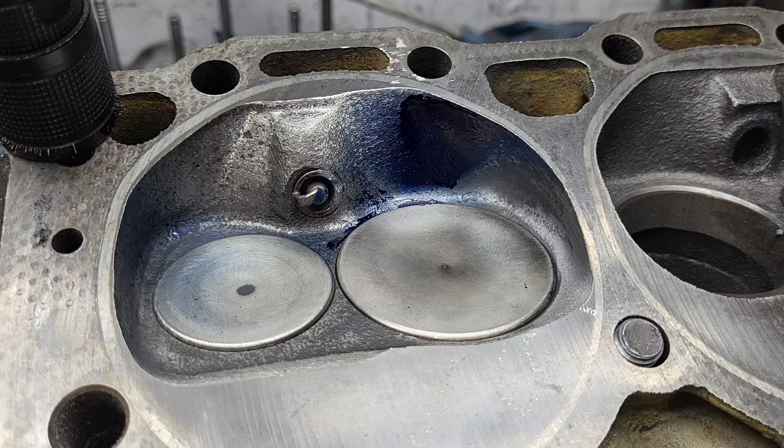Okay, guys, back on the throttle body Mission Impossible. The only thing that I changed at all on this was I took this corner out. You can see the difference between this corner and this corner. They're really blocking this off quite a bit, even with a 194, right? Now, you got to remember, I had that plunge cut out for the 2055, but it was still really close.

So this frees up some area right here, which, in my opinion, should speed up the short side because it's going to be able to get air out easier this way, which will also counteract our swirl a little bit. Now, will that be productive? We'll find out. As far as our liquid on our chamber, really doesn't look much different than the last time we looked at it. It looks damn good.

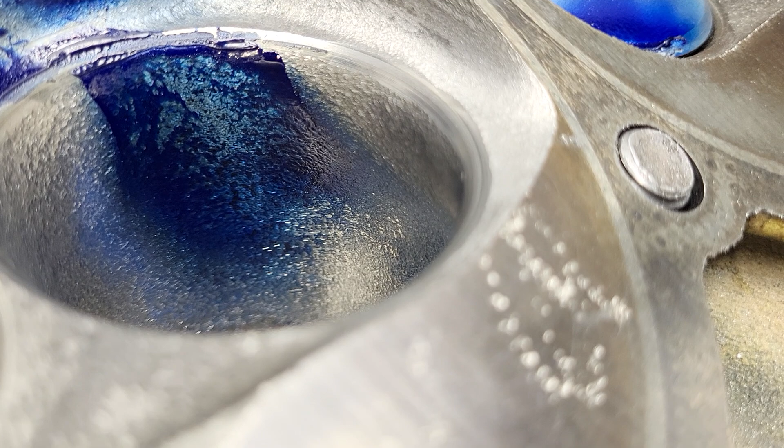Let's take a look at our bore. Okay, our bore looks pretty good as far as I'm concerned. No big changes. All right, that does look a little bit different. I think it's a little straighter and a little narrower, but on the divided wall side, that looks like it's moved over quite a bit. I don't remember this having this angle right here on the last flow. Now, that may have something to do with more air coming out this way, right? Interesting to think about.

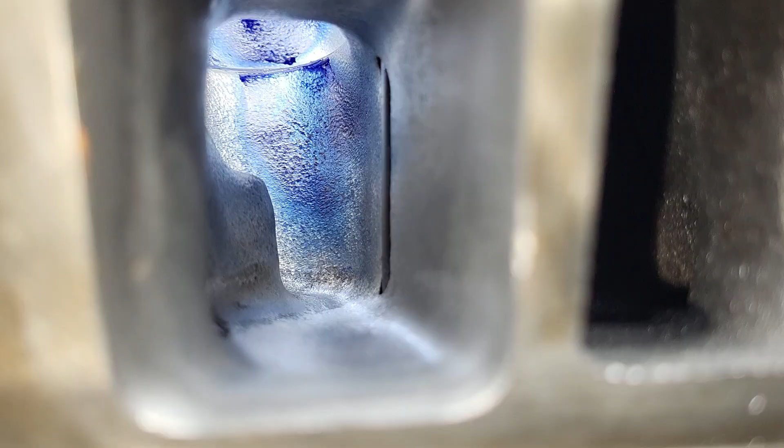Okay, take a look at our valve. It's definitely lighter on this side. It's more concentrated on that one side there. Okay, it definitely looks narrower in the center of that bore than it was to me. We'll have to find out, according to the flows and the swirls, whether it's worth notching that chamber out or not. Remember, you lose a little compression that way. I mean, if you gain flow, does it really lose compression? I always thought about that. It would have to gain a decent amount of flow in order for it to be worth it, I think, at this point.

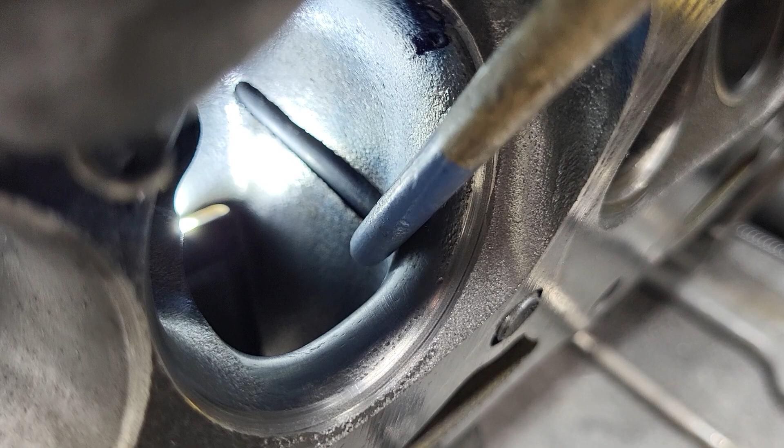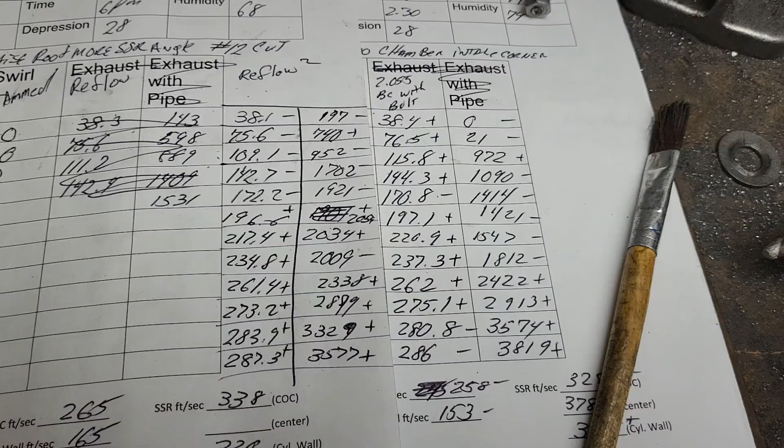Okay, trying to see what we can see there. Let me see if I can one-hand this for you guys. Since this has been freed up, we're able to get more across this side. So this side should have sped up in airflow speed. Okay, the rest of that short side and everything is exactly the way we saw it last time. Okay, I goofed up. I actually did the first flow without the damn bolt in there. So we're not going to count that one. This one, I put the bolt in because that's how the 12th cut was done.

So how did we do? We got plus, plus, plus, small pluses, but still pluses, minus, plus, plus, plus, but it didn't quite top out as good. So if we're running at 600, we got a little bit of a gain at each point, a little loss, a little gain. This is actually a decent sized gain right here. Right, 109 to 115.8. That's a good jump.

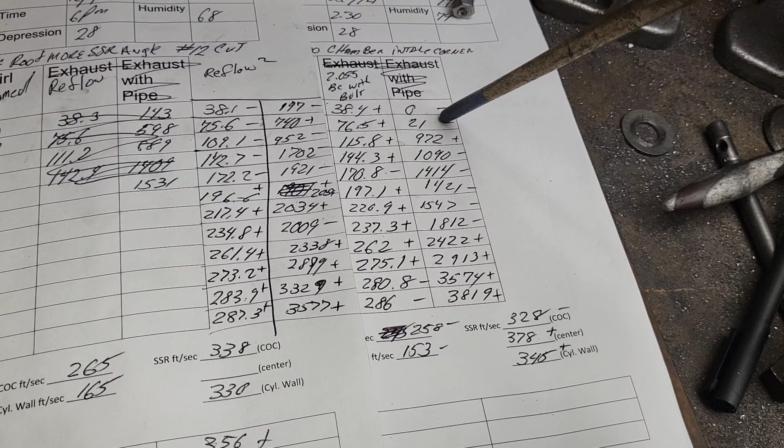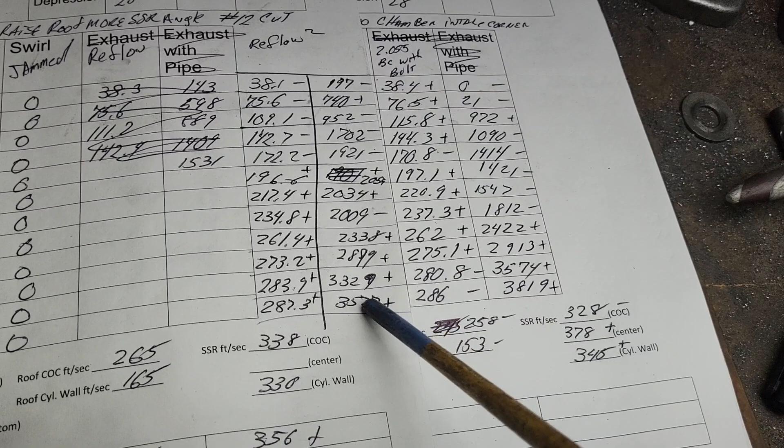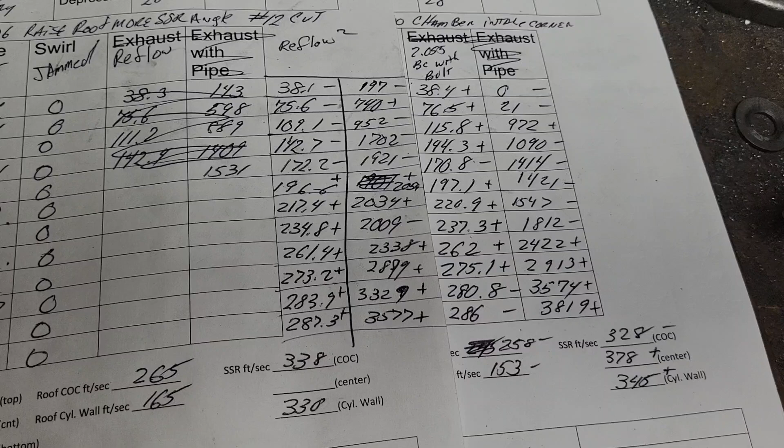Now let's take a look at what happened to our swirl. Notice we said it should knock the swirl down. Well, it did. It was actually 0 at the start, which I was amazed to see. And then it progresses nicely, and then it kind of gets overly fast at the very end. It's actually still a little bit faster than I'd like at 600 lift. But this is a better curve than this curve. So, considering how many pluses we have, and the swirl, I'm kind of leaning towards it, even though I didn't like the Dicam quite as well. And when we go through the airspeeds, I think I might be able to explain that.

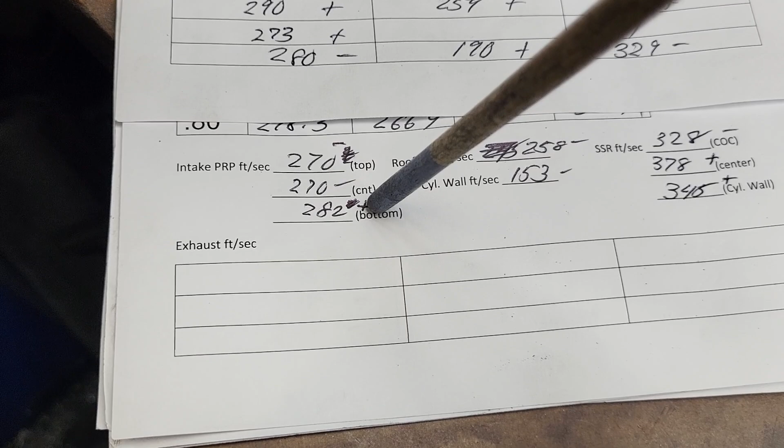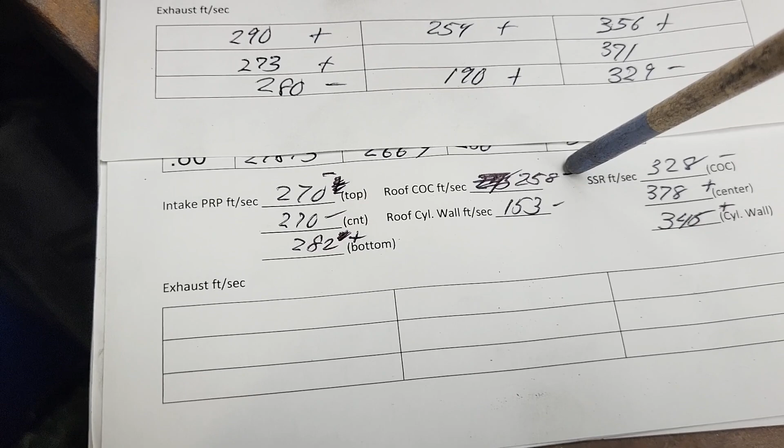Okay, these are our 12th cut airspeeds. These are our 13th cut airspeeds. So these actually went down a touch. This went up a touch. All measured at 600 lift. Not really sure. I was having a bit of an issue with the clay. The clay was starting to give me a hard time, so the clay may not have been exactly the way it was last time. As far as your roof, there's a mistake there. Let's fix that. Okay. Our roof got faster on the center of the cylinder, but it got slower on the cylinder wall side. Let's see what happened on the short side.

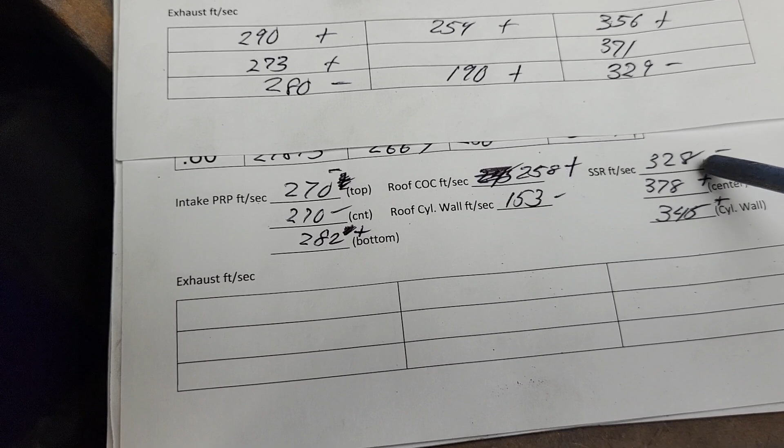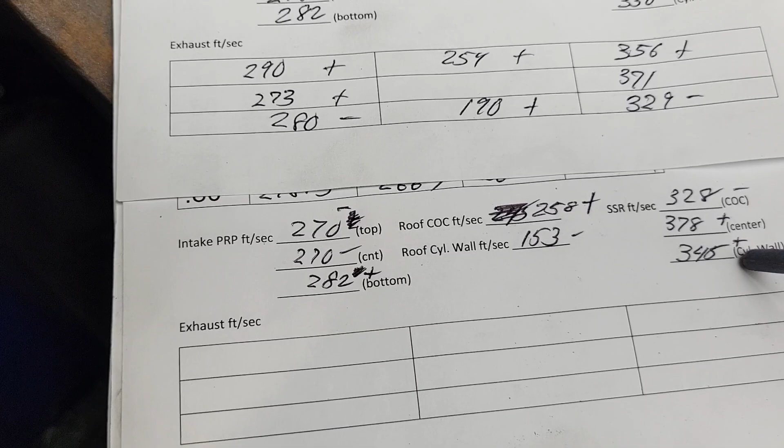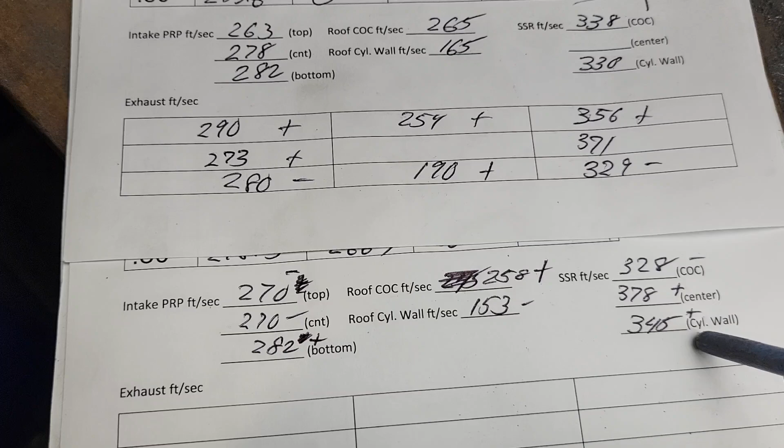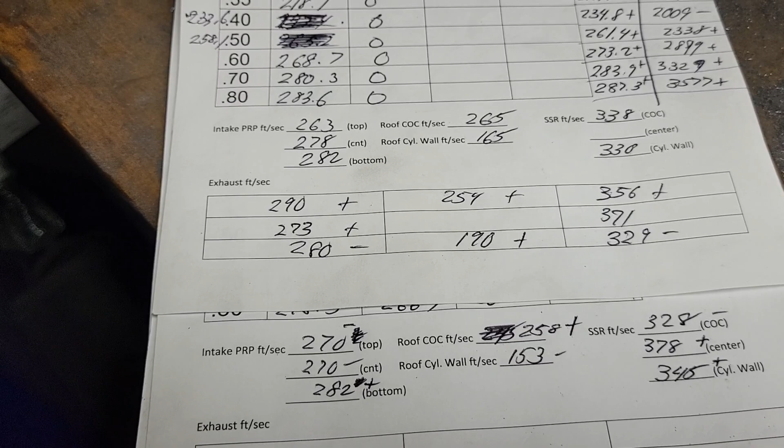Okay. Center of the cylinder, we lost quite a bit of speed, 338 to 328. The center stayed relatively the same, just went up a touch. Look at how much higher it went on the cylinder wall side. Because it's able to get the air out easier, that really cranked up the airspeed right there. There is probably something to be gained doing something with that corner. I'm going to have to think about exactly what I need to do with it. I don't know. Give me your input on where we should go from here. In reality, it's like the man said, stick a fork in it. It's pretty good for what it is.

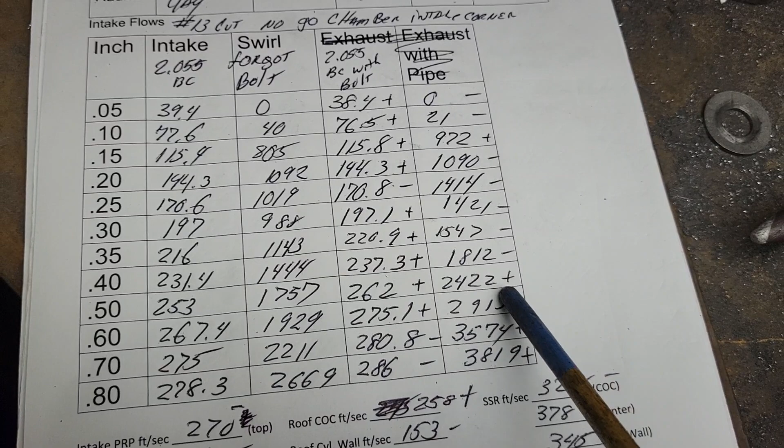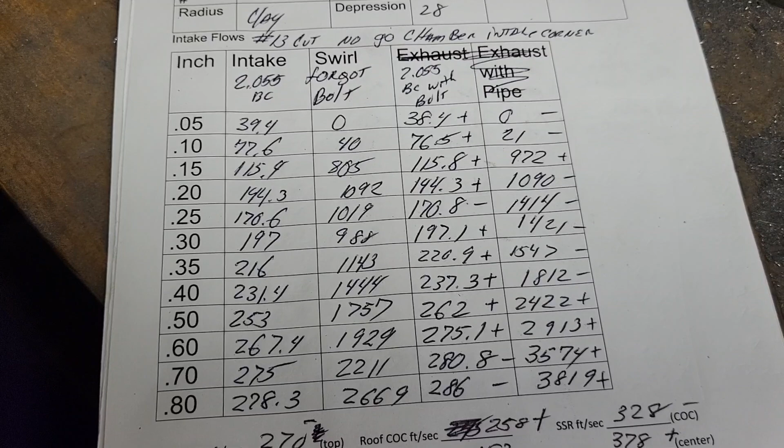You know what is interesting? When I forgot the bolt, notice the difference in the swirl versus with the bolt. It really got knocked down fast because the air can come right through that head bolt hole and completely change the airflow inside the bowl. But look at how much it knocked down. Some of them are actually better, right? And some of them really take a hit. Interesting. Sometimes a mistake is a learning opportunity. So even though I get grouchy when I do it, it's not always the worst thing that happens.

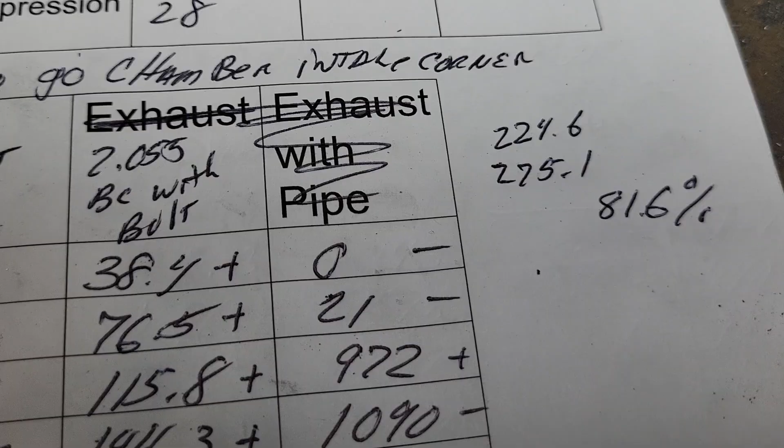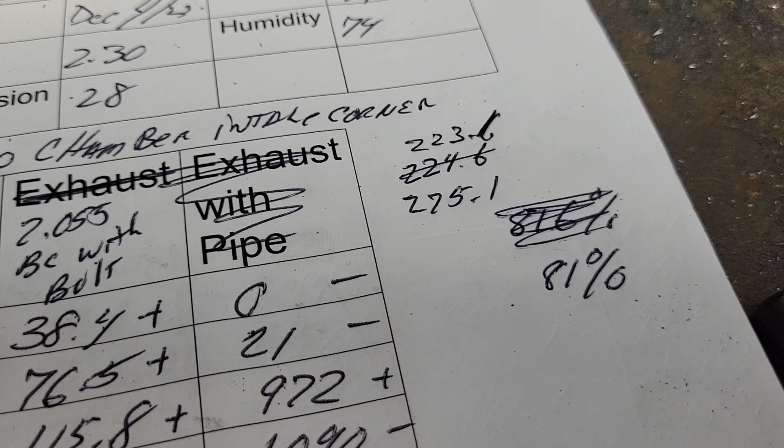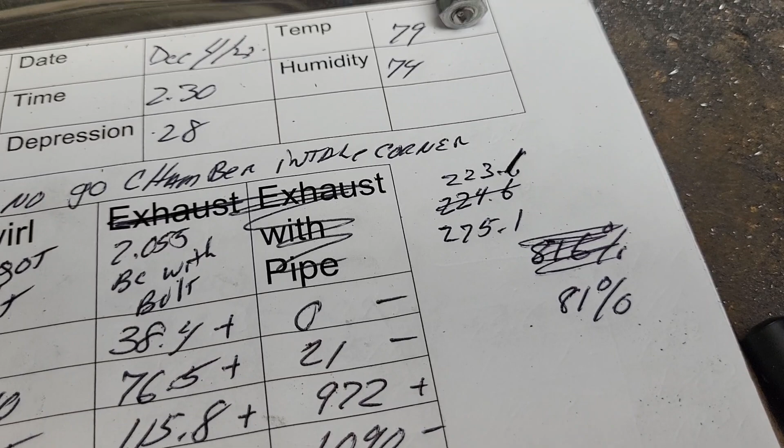All right, you know what we need to do? We need to take a quick look at our intake to exhaust ratio as they sit right now. Let's calculate that up. Okay, I seem to remember that with a pipe we were going 224.6 at 600. I'm not 100% sure if that's correct. Let me just give a quick check. Okay, sorry, I did have that off by a little bit. At least I think that's the latest cut on the exhaust. There's 223.1 with 1 7/8 pipes at 600, and here we're 275.1 at 600. That gives us an 81% exhaust to intake ratio. As far as I'm concerned, that's good.

In fact, if we wanted to do something stupid in the future, like a supercharger or some nitrous, I think that would still probably work. You guys can give me your input on that.